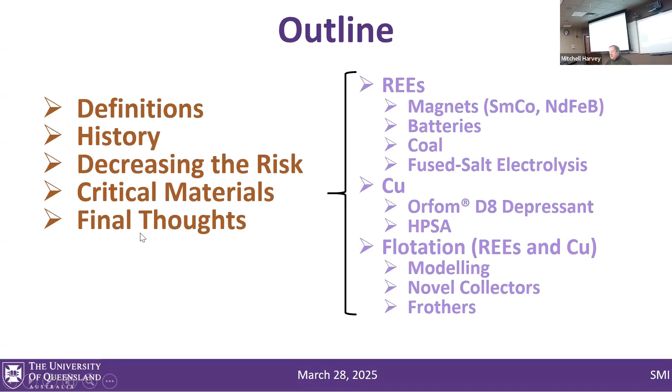Rather than just doing this critical materials part, the real outline is we're going to talk about Montana resources a little bit so you learn about Butte. Then Mitchell will take over with the samarium cobalt magnet recycling research that he's been doing. So that's the outline that you see there.

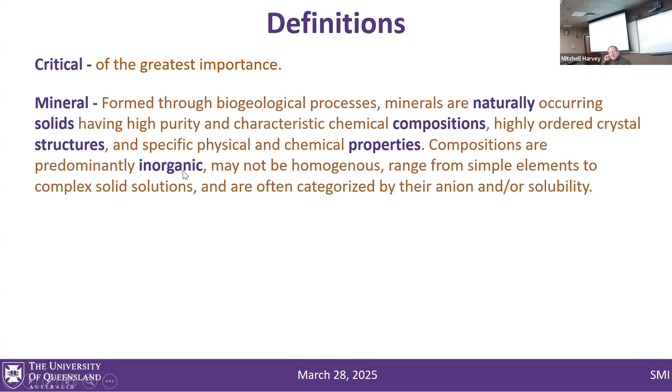So critical, what does it mean? Of the greatest importance. And when you define mineral, there's 5 or 6 categories that are very important for the definition. Number one, it needs to be naturally occurring, needs to be a solid, needs to have a chemical composition. It doesn't have to be precise all the time, but should be close enough to be in a particular composition, a particular crystal structure. Because of structure-property relationships, it'll have particular physical and chemical properties. And another major part of the definition of minerals is that it is inorganic.

Put the two of them together, and a critical mineral means a mineral that is deemed essential to society, but its supply is at risk for a number of reasons. It could be national security or the economy or what have you, but predominantly the supply is coming from unfriendly countries. Disruptions can come in a number of forms, whether it's government action, natural disasters, or increased demand in many other ways. The type of critical mineral varies with time, need, and country.

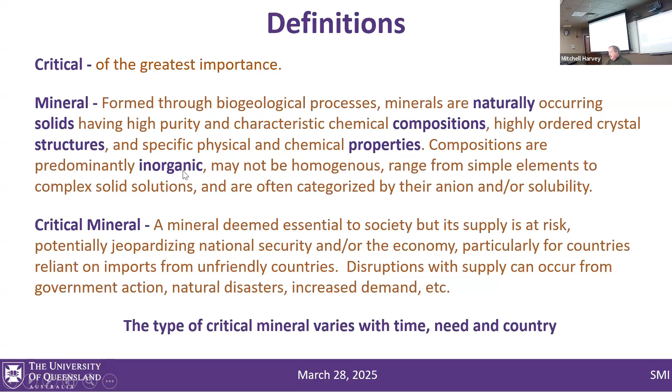So that's it for the definition part. Let's move on to the history.

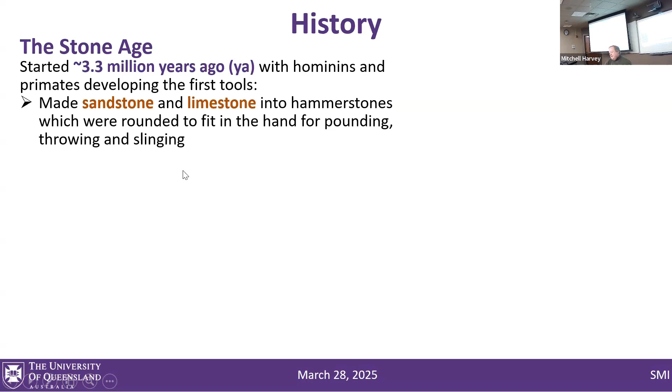Let's jump back to the Stone Age, some 3.3 million years ago, when man was barely walking, wasn't even man back then—it was hominins and primates. And of course what was important to them was sandstone and limestone. Eventually we would use those materials to help us fashion flint and obsidian into blades so that we could have knives and axes and spears and arrows, and we could go hunting and things like that.

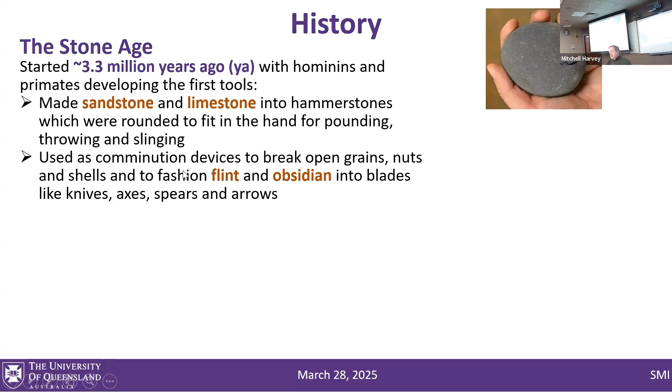But it wasn't until about maybe 5,000 years ago that we started to come out of the Stone Age into what we call the Bronze Age. Bronze is bronze because of the importance of tin, which we get from cassiterite, and the copper was coming predominantly from cuprite and chrysocolla, but some chalcopyrite. Somebody somehow figured out if you mix the two together, you get bronze.

Then in 1200 BC, not but 3,000 years ago, the Bronze Age just collapsed. Within a 50-year period, it's not really well known how it collapsed from region to region. It's just that it was gone, and in came the Iron Age.

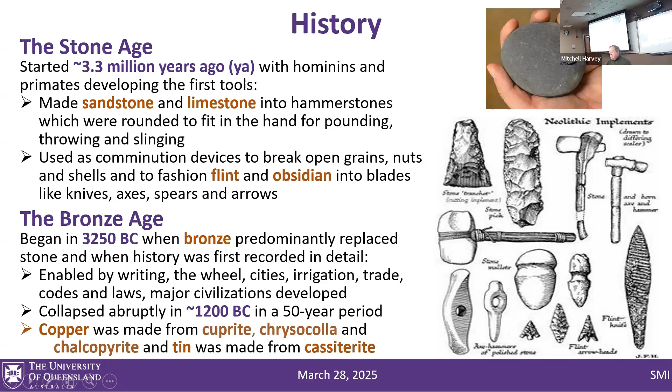Here the critical materials are minerals are hematite and magnetite, and those were used to make steel, even though it's called the Iron Age. We figured out how to adopt the bronze copper making process and apply it to steel. That required higher temperatures and purer forms of carbon—it was no longer really coal, but metallurgical grade coal, etcetera.

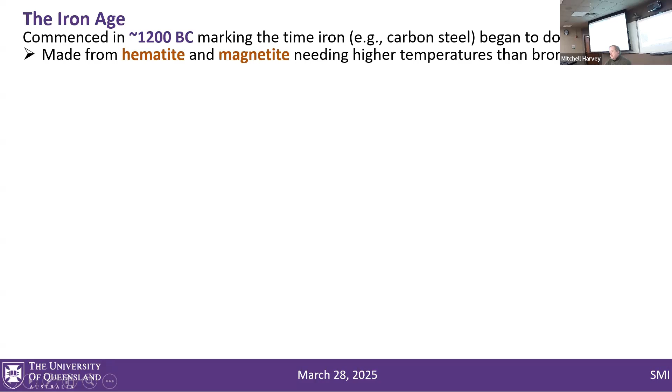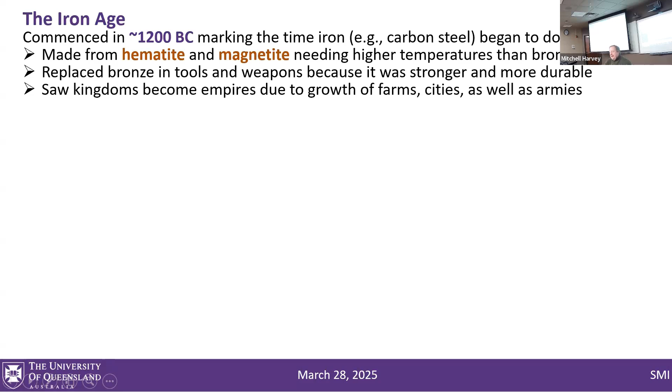Eventually iron, or steel, replaced bronze. Because of that, kingdoms grew, became empires. We were able to feed the soldiers, grow farms, and have cities with some sort of security. When you got happy soldiers, you got a happy government. So technically, though, man is still in the Iron Age.

3,000 years passed before anything really major would happen, and then that was the first industrial revolution, most of it in Great Britain and the United States, but across the world. 1760 to 1830 was all about industrial mechanization. Shortly thereafter, the second industrial revolution took place, and that was technological advancement.

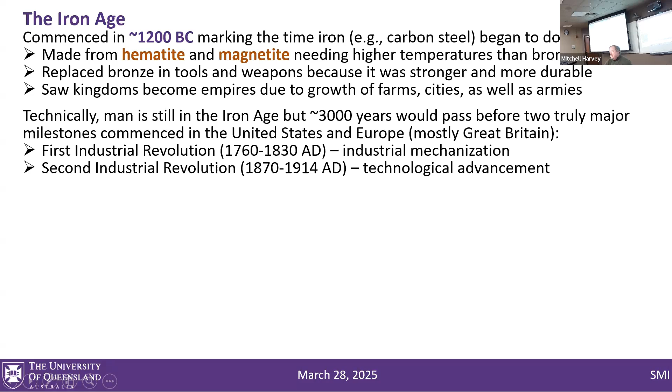Today, we have the periodic table at our disposal, if you will. Everything on that periodic table could become critical. It's interesting that the United States lists at least 50 on one particular list and another 19 on another list. Combining the two, I think there's like 53 critical minerals being listed.

Among those are copper, cobalt, and nickel, which typically, if you've got a copper ore, you've got cobalt and nickel as well—not always the case, though. And then, of course, rare earth elements are also critical, and many, many others. Those would include the 50 and the 19 that I was talking about.

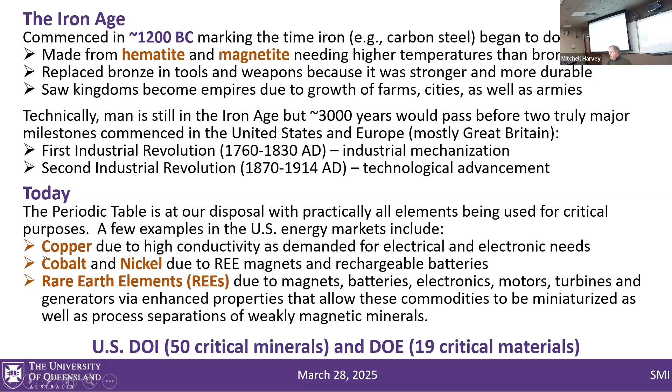This is the Department of the Interior and the Department of Energy. Combining the two lists and taking out the commonalities, it's 53 in all. Now that's a little bit different than copper and tin from the Copper Age and just iron from the Iron Age.

53 today, okay? Aluminum, antimony, arsenic, barite, beryllium, bismuth, cesium—I'm not going to name them all. There's the whole list, and we've sent you the PDF of this presentation, and you can see those for yourself. You probably already know them anyways, being the Sustainability Materials Institute.

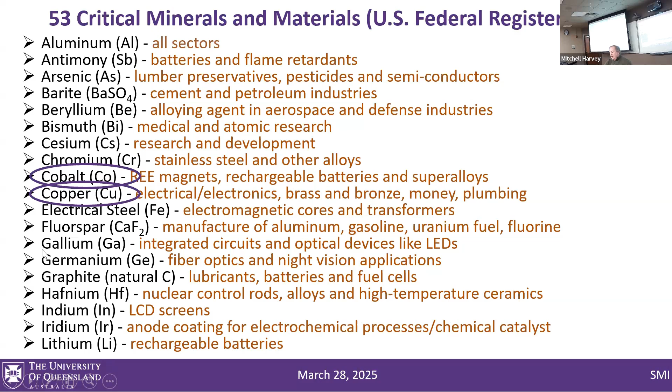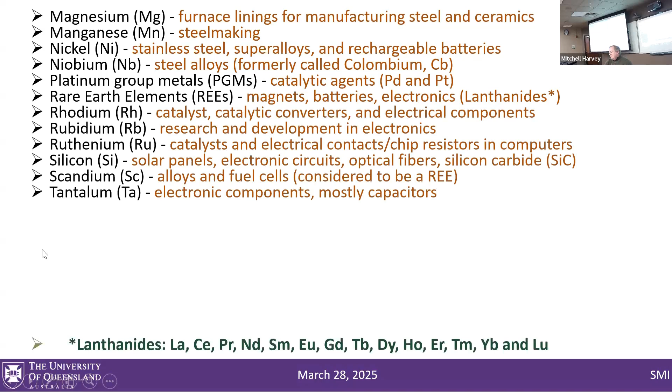But the ones we'll talk about today, predominantly copper and cobalt, because it's cobalt samarium being recycled. And then, of course, the rare earths that you see on this list and a whole number of other lists on there. It's particularly the samarium that got moved—oh well, that should be circling the samarium.

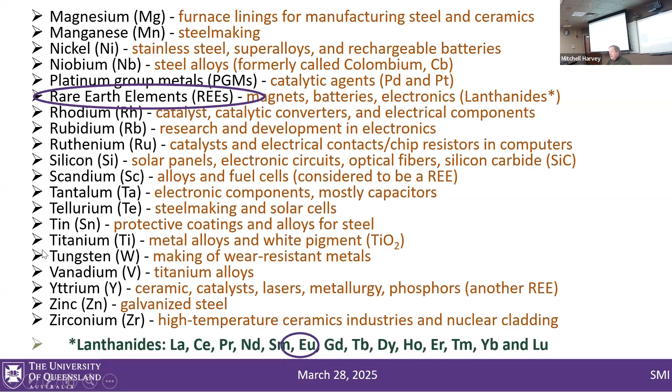Okay, so enough of the history, and we're going to talk about now decreasing the risk. So when we decrease the risk, there's several ways you can go about that. You can increase domestic mining and processing. President Trump, I think it was not even two weeks ago, signed an executive order to start increasing domestic mining.

We can also do that by starting recycling programs, and that's the research that you're going to hear from Mitchell. And then, of course, maybe sometime 50 years from now or whenever, we're going to replace samarium cobalt with something else. So we're always developing replacement materials.

It's important to understand that most critical minerals and materials are byproducts of processing primary mineral metal ores, and that's where this plot comes into play. The circle in the very center are your primary metals, and it's pretty obvious that if you've got copper, odds are that you're going to have selenium and tellurium as byproducts of that copper production. A little bit further away, you might have cobalt in there, and even further away, maybe some indium and other things. So all those minerals are on the critical list.

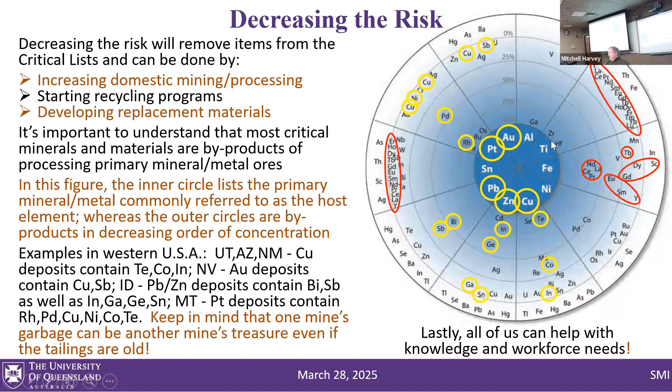Interestingly, a lot of the rare earth elements that you see, I just circled in red there—look at the primary minerals. You have a huge iron ore body on the west coast of Australia; maybe you got rare earths in those. I don't know. Beach sands, as we know, particularly the titanium industry, you got rare earths there. And tin, you can also have rare earths as well.

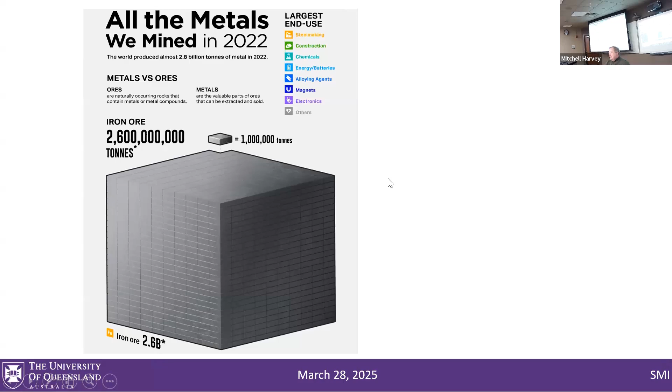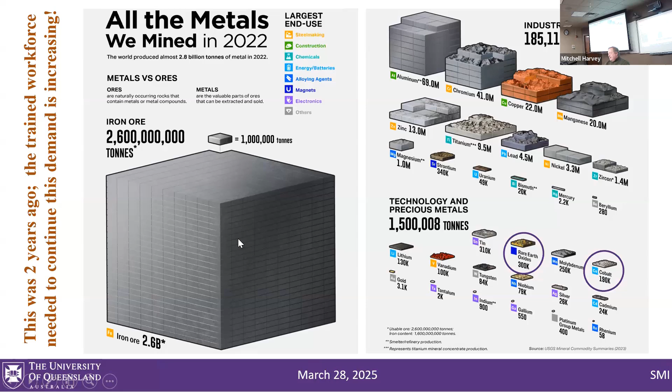That's incredible. So copper supply and demand: copper consumption over the last 25 years accounted for half of the copper ever mined. Copper consumption over the next 25 years will be equivalent to all of the copper mined to date. Australia and the United States are pretty good suppliers of that, but nobody matches Chile. Increasing demand requires increasing supply.

Chinese copper production is actually expected to go down, and so that's going to end up being a critical material for them, if it's not already. China is compensating by taking over production elsewhere, in the Congo, in Peru, and what have you. So they are getting those sources.

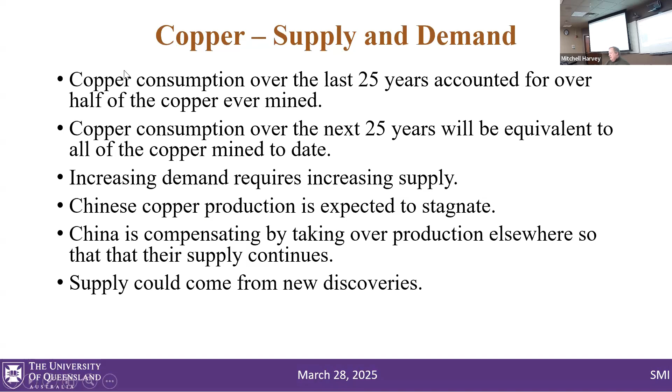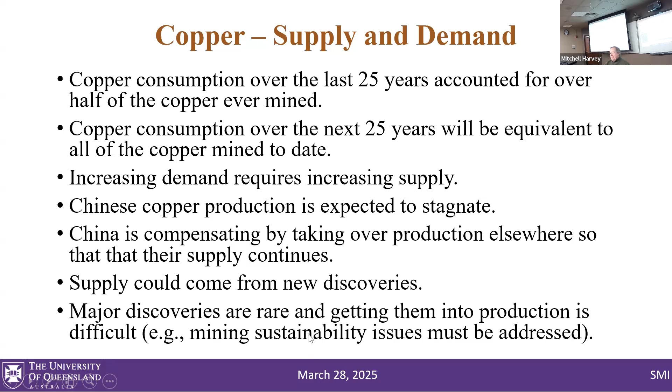Supply could come from new discoveries. New discoveries, though, are pretty rare. Once you find one, though, they tend to be quite large. Major discoveries are rare. Getting them into production is the difficult part because of mining sustainability issues, and that's where we come in.

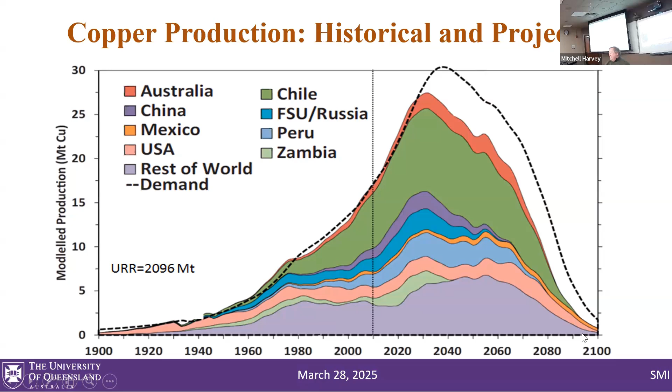Historically, you can take a look at this plot. China is in the purple, and that's what I said - they're not a huge producer, but eventually it's going to stagnate. Chile here in green is the dominant source, and they're going to be playing a major role. But take a look - 60 years from now, copper production, we're going to be out of ore. We've got to find new sources or replacement materials.

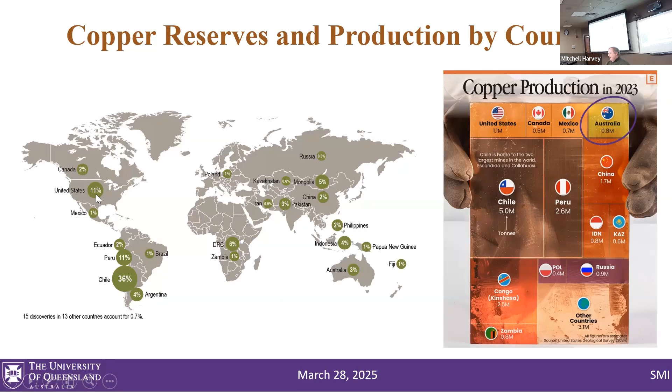So just take a look at copper production throughout the world. I just want to mention Australia is a major player, but they're only 3% of world production. Take a look at Chile at 36% production. The United States - where are we right here? 11% production. So not too different, but between us, we're pretty solid.

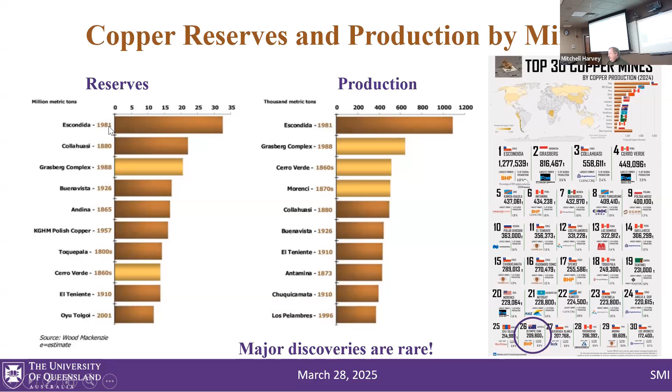This is by mine, and if you take a look at the top mines in the world, Australia is number 26 on the list - I think that's Olympic Dam. I can't read that fine print, but I'm pretty sure that's correct. Again, major discoveries are rare - look at the last one up there on the list, from 2001. So we need to do better.

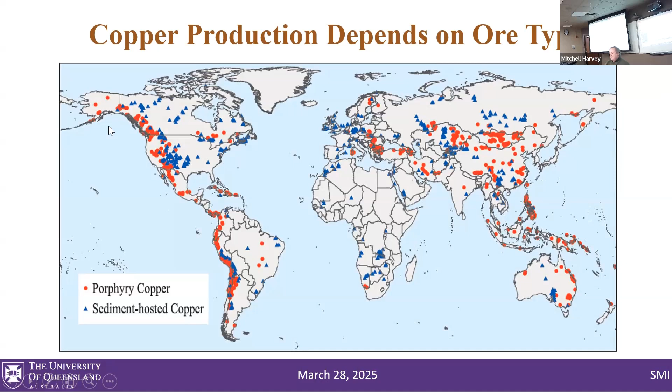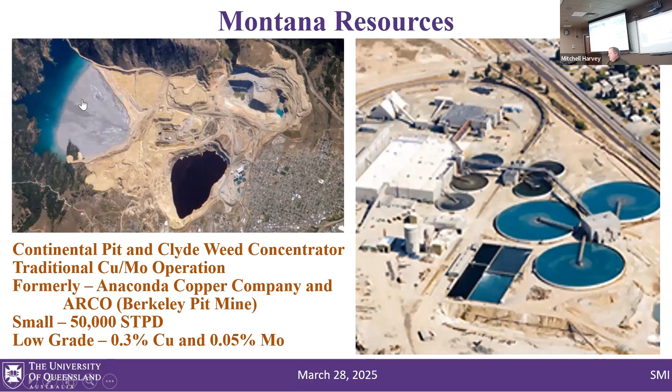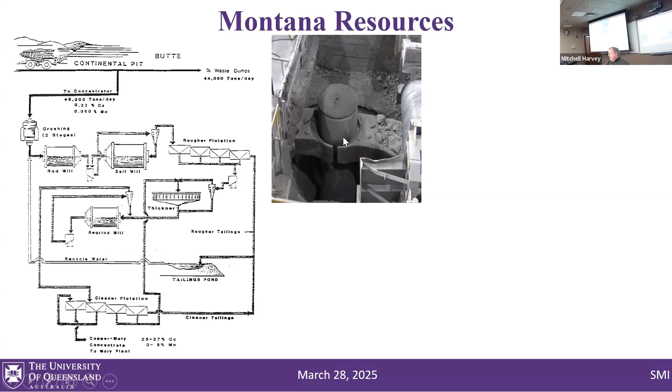So a little bit more close-up view of the process. Obviously, dominating the picture are the thickeners here. And just quickly, this is their process for the bulk sulfide production. So it starts in the main crusher, goes into rod milling, then it goes into ball milling from there, and you can see the row of ball mills in this sequence, or rod mill here.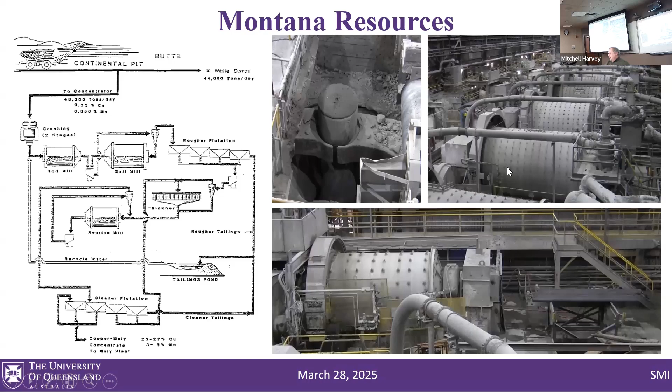I think for every rod mill, it feeds 2 ball mills, and the ball mills are twice as large as the rod mills.

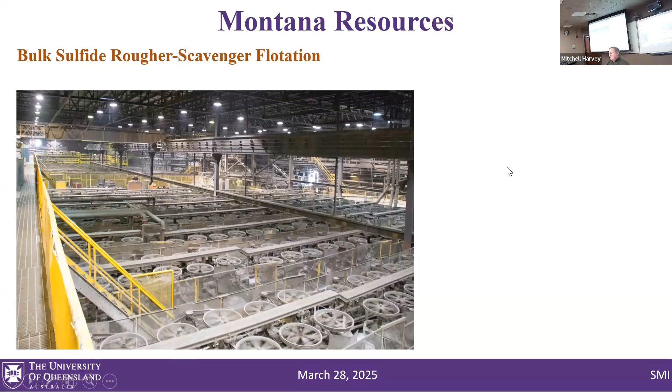Bulk sulfide concentrate flotation deck here. Fairly big. We do use the small flotation cells because these were built in 1955, and that's what we're still using. These are the old Galligher 200 cubic foot square cells.

Here's a close-up view of one of them, immediately below the viewing stand, and the parts that go into it. You've got the belt driving the rotor down below. You can see the rotor on this one, and the stator at the bottom surrounding the rotor.

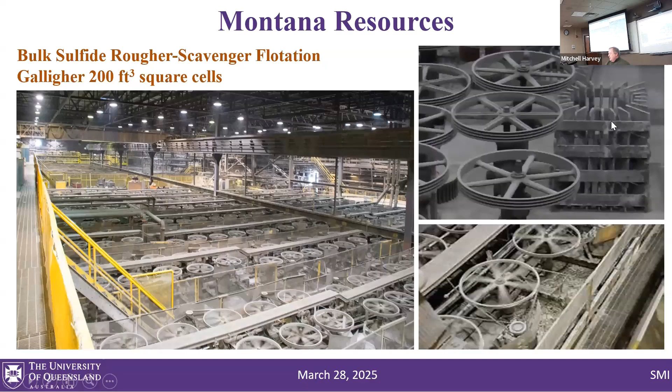200-foot diameter, super thickeners. They were super at the time. I think these are actually small compared to some of them these days.

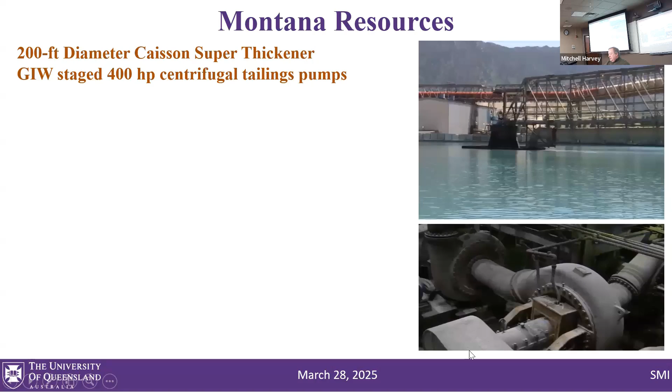The underflow goes into staged 400 horsepower centrifugal pumps. That's what these centrifugal pumps are. There's 3 of them staged, one here, and then one here, and then finally this goes up and over to land level.

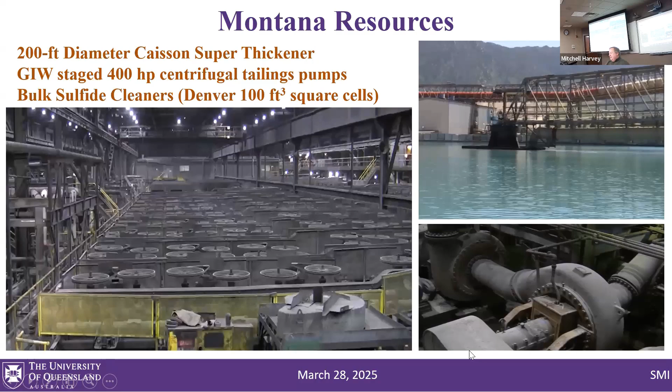And then the flotation turns over from the rougher flotation cells into the cleaner cells. So this is your final bulk sulfide concentrate.

That then gets shipped over to the moly plant. And here you have much smaller cells, around 100 cubic foot.

You've got the rougher, you can't see it, but it's up here. This is the first cleaner, second cleaner, and then third cleaner. And each stage has a bit of a regrind circuit, which you can see in the flow sheet here. In fact, there's the regrind mill right there.

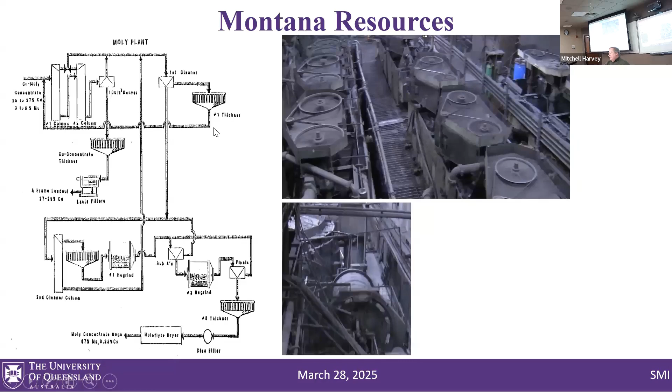And one of the thickeners, I'm not sure which thickener it is in that process. And then there's a better view of the thickener that you see right there.

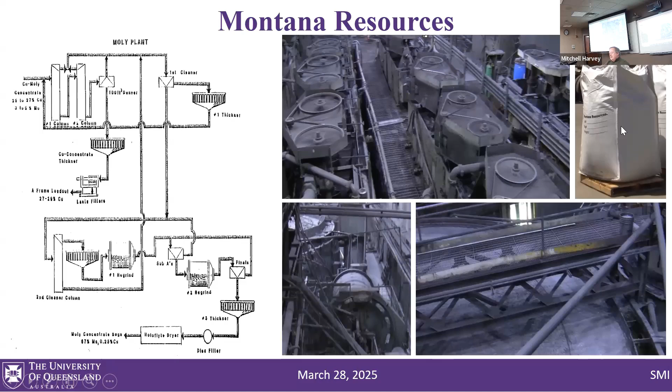The flotation product from the moly plant goes into packaging, and these are a little over 2-ton moly bags.

And that is the Montana Resources property. I'm going to turn it over to Mitchell for the samarium cobalt, and remind you that we do not have cobalt in Butte, but a source of cobalt is a byproduct of the copper industry. And of course, samarium is from the rare earth industry. So, Mitchell.

Okay, so I'm going to be talking about my specific work on a selective oxidation process for recycling samarium cobalt magnets as it relates to critical materials. First, I'll give some background, discuss the process as a whole, give you our preliminary results to date, and then some overall conclusions about the process.

First, it's important to know why we care about samarium cobalt. I'll give a brief history of permanent magnets. For most of human history, the best permanent magnet we had, the only one we even knew about, was lodestone, naturally magnetized magnetite. Other than making compasses, permanent magnets were kind of a novelty until we discovered electricity and then electromagnetism, and then we actually had a use for magnets.

In the early 1900s we had KS steels and MK steels, which are tungsten cobalt steels. They weren't particularly great magnets, but they were the first kind of attempts at strong permanent magnets. Then in the late 30s to early 40s, we discovered platinum cobalt. As you might guess, platinum cobalt was very expensive and only saw limited use, but it was the best technology at the time.

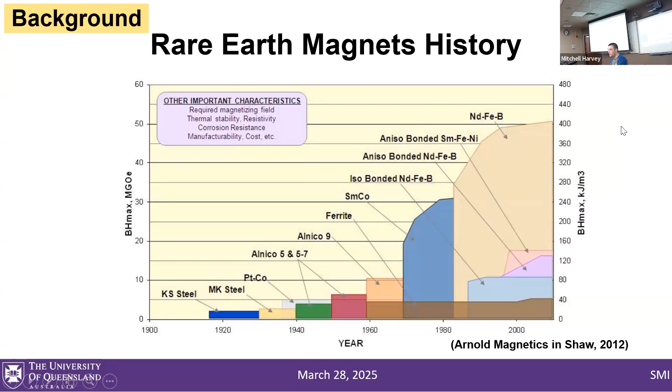So samarium cobalt magnets are either based on the samarium cobalt 5 intermetallic, those are the first generation of magnets, or the 2-17 intermetallic, that's the second generation, and the stuff I'm focusing on because it's the more prevalent technology today. And why we care about samarium cobalt is because even though it's weaker than neodymium iron boron magnets at room temperature, it has a lower reversible temperature coefficient.

So all magnets lose magnetic field strength as temperature increases. And depending on the material, they decrease more or less as a function of temperature. So samarium cobalt loses less magnetism with temperature. So above about 150 Celsius, samarium cobalt outperforms neodymium iron boron.

And so it sees a lot of use in very specific high technology applications, such as radar receivers, certain motors, and control surface actuators in airplanes. And so it's still used in very critical applications, although as a function of cobalt consumption, it's a very small percentage of the overall cobalt market.

Besides samarium cobalt magnets, cobalt's also used mostly to make cathodes in lithium batteries. It's also used to make cemented tungsten carbide. So if you've ever heard of tungsten carbide tooling, people think it's just pure tungsten carbide, but actually it's a bunch of tiny tungsten carbide particles glued together by a cobalt metal binder. So that's another big use of cobalt metal, but I'm getting off track here.

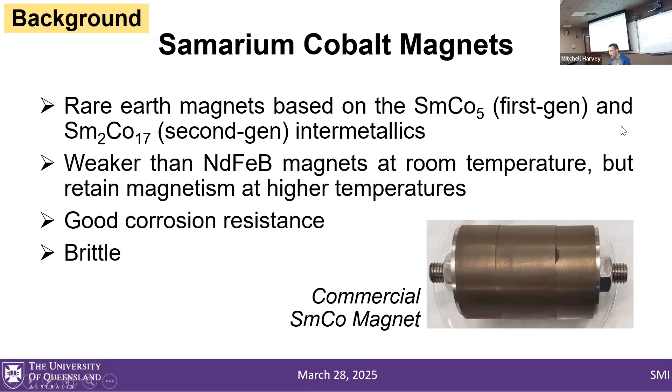Oh, another interesting property I forgot to mention is that the 2-17 magnets are cool. If you add gadolinium to them, which is another critical material, that reversible temperature coefficient becomes almost zero. So you can have magnets that have a constant field strength over a fairly wide temperature range. That's extra important, and like I said, the radar receivers are really important there because they operate at various temperatures and you need that magnetic field strength to be constant.

Courtney almost dropped his coffee cup.

So in addition to samarium and cobalt, the 2-17 magnets also contain appreciable quantities of iron, copper, and zirconium. You can see the different grades in the table below - there's the standard grade and the high temperature grade. All these elements, with the exception of iron, are considered critical in some capacity by various agencies, depending on who you listen to. So we want to look at recovering as many of these as possible.

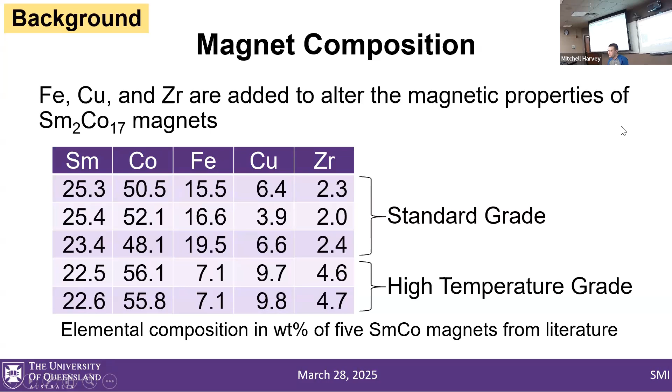And to do that, we're going to use selective oxidation. So intuitively, we know different metals oxidize more easily than others. So we have a generic metal plus oxygen going to a generic metal oxide.

Gold, for instance, is very noble. If we have a chunk of gold, we can heat it up in air to very high temperatures, even to its melting point, and then when it cools back down, it'll be just as shiny as when you started to heat it up. Other metals like iron are fairly reactive in air, and if you have an uncoated iron specimen in the right atmosphere, it'll oxidize quite rapidly. And then metals like sodium are extremely reactive and they'll react instantly.

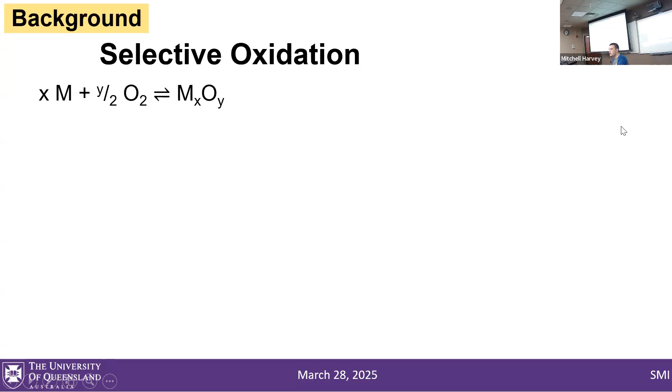Now, part of this is kinetics of the reactions, but the other part is thermodynamics. So this is the thermodynamic equation where you take the free energy of the reaction and do some math with it. But what it allows you to do is calculate the oxygen partial pressure in the atmosphere, so what pressure of oxygen, above or below which a metal will not oxidize.

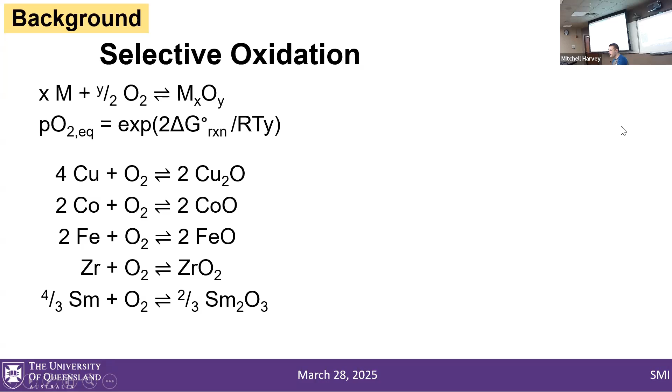So our goal with this project was to recover as high a grade of cobalt metal as possible, so hopefully, ideally, it could be used for not only creating new magnets, but also other applications such as cemented tungsten carbides or lithium batteries.

Unfortunately, cobalt and iron are very similar. They're not quite as similar as cobalt and nickel, but they're harder to chemically separate. And if we're going to try to retain the cobalt as the metal, we want to oxidize the iron away, so we force the iron to the oxide phase. The zirconium and the samarium are going to oxidize very easily. So we're going to control our oxygen partial pressure such that we don't oxidize the cobalt or the copper, but oxidize the iron, zirconium, and samarium.

And an important intermediate compound in this reaction is samarium ferrite. So in the previous slide, I assumed all the metals go to their oxide with no interaction between metals, but that's not actually the case.

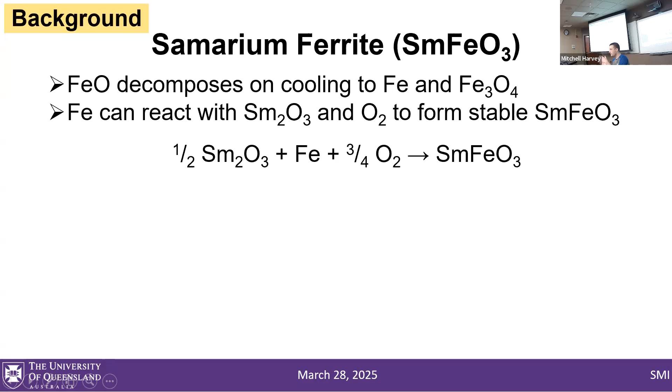And so we're going to try to form samarium ferrite. Iron metal reacts with samarium oxide to form the stable species samarium ferrite, and this is stable in that PO2 range between the cobalt line and the iron line. There's enough samarium in standard grade magnets to sequester up to half of the iron to samarium ferrite. So if we can sequester half of the iron to samarium ferrite, then the remaining iron monoxide, when it cools, only a quarter of that will decompose. So we can sequester 7/8, or about 88%, of the iron in the oxide phase, greatly reducing the iron content of our cobalt. And in the bottom right, you can see some of the samarium ferrite.

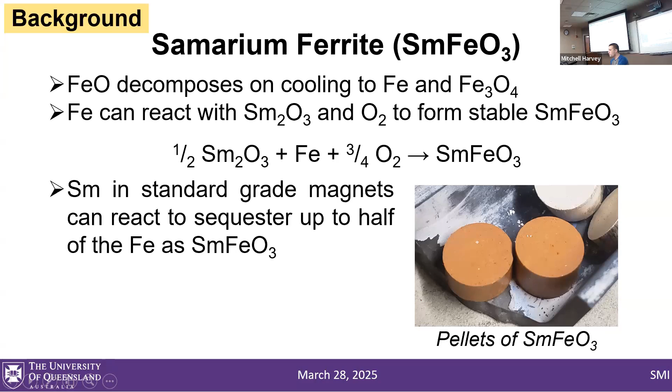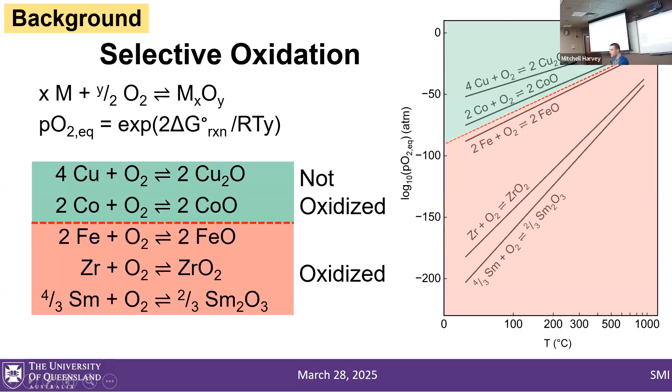And we don't want to do that. We're trying to retain the cobalt as a metal. So what do we do? Well, fortunately, copper has limited solubility in cobalt. If we look at the phase diagram, below about 500 C, there's almost no solubility of copper in cobalt.

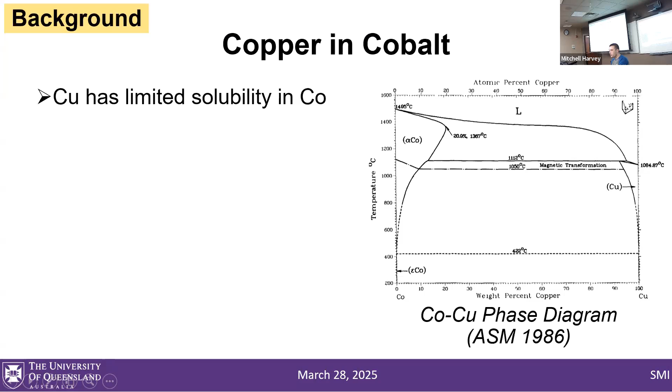I'm skipping ahead a little bit to show you a brief result. When we do this selective oxidation process, and all the other stabilizing elements, the samarium and zirconium that help stabilize the cobalt or the copper in the alloy, are removed by oxidizing them, you actually get these blebs and streaks of copper that precipitate in the oxidized magnets. So we're hoping we can leverage this to separate the copper and the cobalt.

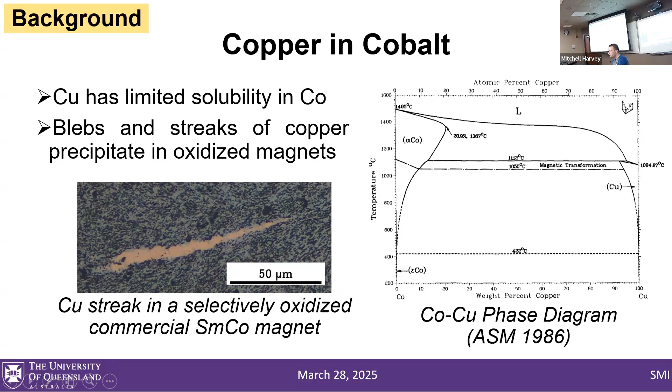So this is the overall reaction that we're building to. We've got samarium, cobalt, iron, copper, and zirconium plus oxygen going to samarium ferrite, iron monoxide, cobalt, copper, and zirconia. Then the iron monoxide decomposes to iron metal and magnetite.

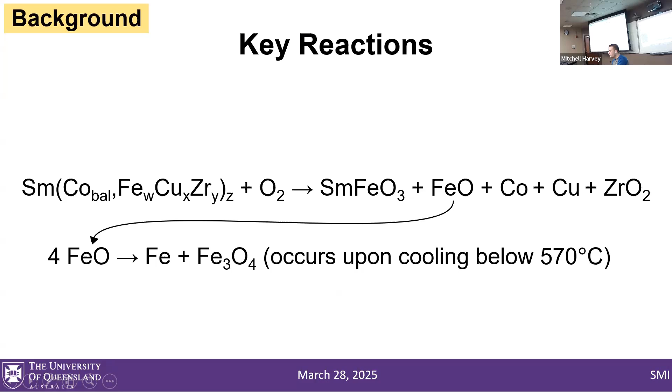You might notice a few things about some of these species. Cobalt and iron are both ferromagnetic, so they're very strongly magnetic. The magnetite is very magnetic, not quite as magnetic, but still quite magnetic. Samarium ferrite is weakly magnetic, and copper and zirconia are not magnetic to any appreciable extent.

So if we can somehow oxidize these magnets and then grind them and liberate all these individual phases, we should be able to perform magnetic separation. And using no chemicals other than oxygen, we can do a pretty good job of separating all the different components.

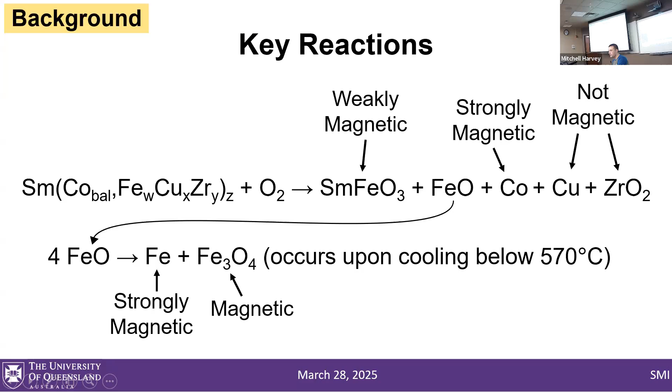And this is the process flow sheet that we've developed for that. First we take our scrap magnets, crush them to increase the surface area, perform our selective oxidation process, then grind them to liberate the phases, leaving us with a mixture of cobalt metal, iron metal, copper metal, magnetite, samarium ferrite, and zirconium oxide. We then do our magnetic separation.

Our strongly magnetic phases, cobalt and iron, are recovered as is. Our copper and zirconium oxides are our non-magnetic fraction. We then leach those with your acid of choice — in this case, I'm showing sulfuric acid. And then we can control the Eh and the pH to not dissolve the copper, but dissolve the zirconium.

Our weakly magnetic fraction, the magnetite and the samarium ferrite, we then send forward to a selective reduction step. Samarium is very difficult to reduce, whereas iron is fairly easy to reduce. As Courtney was saying, we discovered the technology to reduce iron centuries ago. It's very easy to reduce.

So if we throw carbon or hydrogen at the samarium ferrite and the magnetite, we will reduce the iron to iron metal while keeping the samarium as samarium oxide. That's how we're going to separate the iron and the samarium there. So this is our flow sheet.

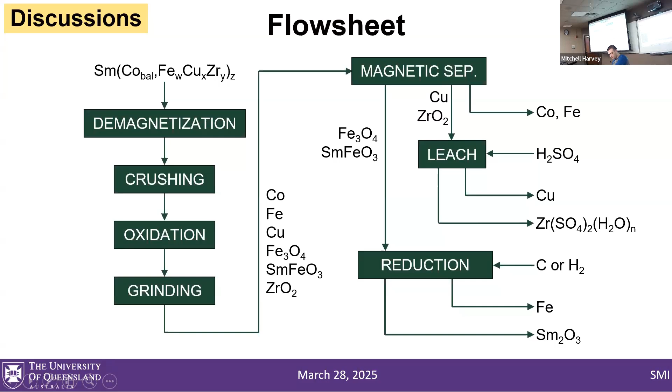This whole selective oxidation process revolves around controlling the PO2 within a fairly narrow window, as you saw in the previous graphs. If you look at our graph here, the scale on the left — I didn't highlight it before — this is the base 10 logarithm of the oxygen partial pressure in atmospheres. You can see it's negative tens of numbers, negative tens of atmospheres.

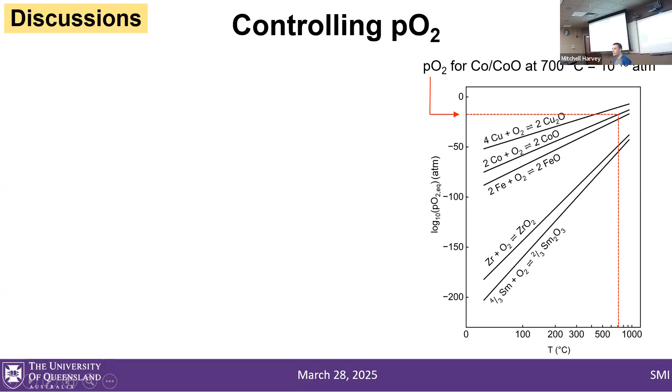For example, the cobalt oxide line at 700 degrees Celsius has an equilibrium oxygen partial pressure of 10 to the negative 18 atmospheres. That's so incredibly low — you're never going to get this oxygen concentration by just diluting oxygen with argon or some other inert carrier gas. So how do we get there?

Traditionally, you would use mixtures of oxidizing and reducing gases, such as carbon monoxide and carbon dioxide, or hydrogen and dihydrogen monoxide. And these work very well. If we were ever to scale this process up to an industrial process, the hydrogen-water route would probably be the way to go.

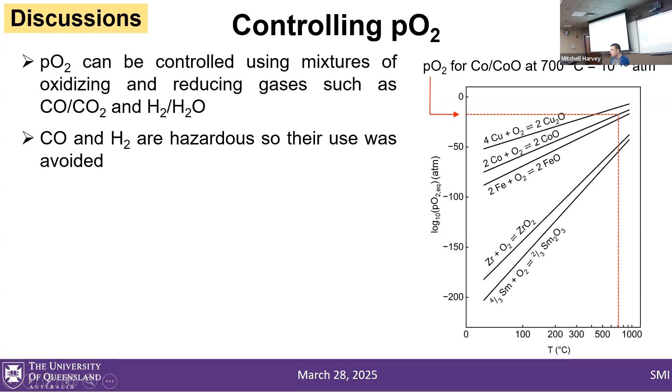But on a lab scale, we just don't want to work with these. We don't want to work with carbon monoxide — it's toxic and flammable. And hydrogen is also very flammable. So what choices do we have left? Well, these lines that I've drawn are the equilibrium between cobalt metal and cobalt oxide. So what if we just mix together cobalt metal and cobalt oxide?

They're going to react at high temperatures. If there's any extra oxygen in the system above the equilibrium value, the cobalt metal is going to oxidize to cobalt oxide. And if there's too little oxygen below the equilibrium value, the cobalt oxide will decompose to cobalt metal, releasing oxygen.

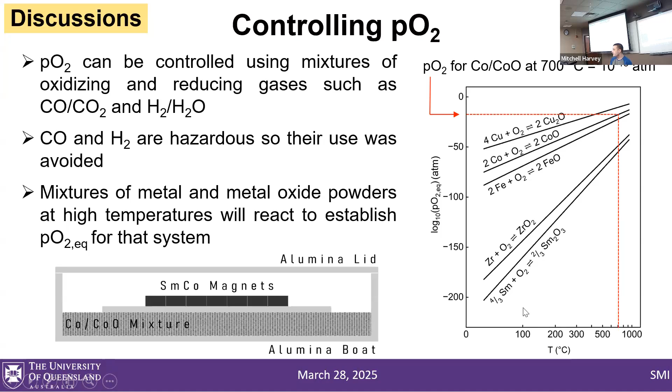What we're doing is placing the cobalt oxide mixture, then placing our magnets on top of that. The oxygen will diffuse and transport through the atmosphere and selectively oxidize our magnets. We're trying to do kinetic studies to figure out the best way to actually do this, but for right now, this is just our setup.

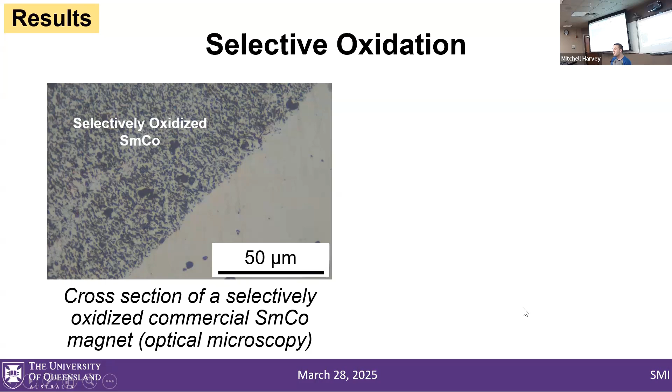And our results so far, you can see this. This is a cross-section, a zoomed-in polished cross-section of one of our selectively oxidized magnets. In the top left you have our selectively oxidized zone, where the dark spots are oxide particles and the light spots are cobalt and iron metal particles. In the bottom right you have the unreacted samarium cobalt.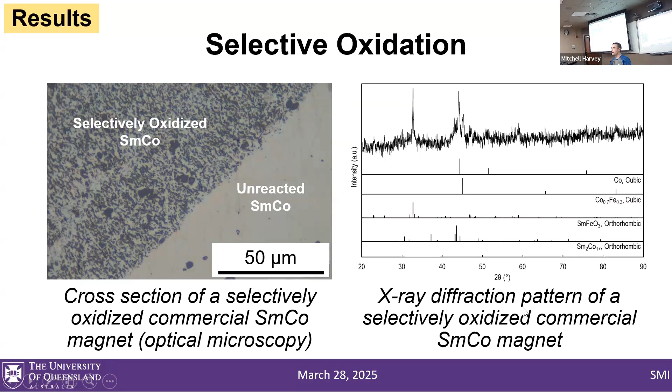If we do X-ray diffraction on this, it helps us determine what crystal phases are present. We can see we have cobalt metal, probably some iron and cobalt metal in solid solution, samarium ferrite, and the unreacted intermetallic. This is a pretty noisy scan, and it's pretty hard to get a good scan with the copper tube, but we can see pretty confidently that we have both cobalt and samarium ferrite. So the overall reaction we were showing before, we're pretty confident it's progressing as predicted based on thermodynamics, and this is also backed up by some other literature results.

We go to SEM now. This is a much higher resolution SEM image of a commercial magnet that has been fully selectively oxidized. We can see a lot of interesting things. This is a backscattered electron microscope image, and the important takeaway is that the brighter the area, the higher the atomic number. So the very bright areas are rich in samarium and the very dark areas are samarium poor. Hence bright areas are samarium oxides, dark areas are cobalt metal.

And we get a very interesting oxide microstructure. At the edge, the oxide microstructure is very fine, and as you progress toward the interior it gets very, very coarse. Part of the work we're trying to do is optimize this microstructure, trying to get this very coarse oxide, because the fine version is very difficult to separate. These oxide particles are maybe 1 to 10 microns, and the coarse ones are 10 to 50 microns, depending on how you measure them.

Another interesting feature of the selective oxidation is you get this core of metal. This magnet has been fully oxidized for multiple days, and this is a core of copper, cobalt, and iron metal that segregates in the middle of the magnet. So you can very easily break off the outer shell and get access to this nice meaty metal core. Unfortunately, to date...

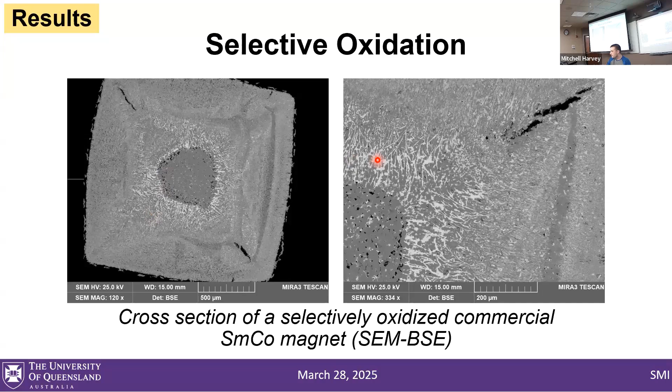Liberating the samarium ferrite in the selectively oxidized magnets has proved quite difficult due to the ductility of the cobalt phase. The oxide particles are very small, and the cobalt is the continuous phase, so the cobalt metal completely encapsulates all the oxide particles. Cobalt is a metal, and metals are ductile — we knew this going in — but we were hoping that if we ground the metals enough, if we cold worked them enough, they would become brittle and we'd be able to liberate the two phases. But that's just not been the case.

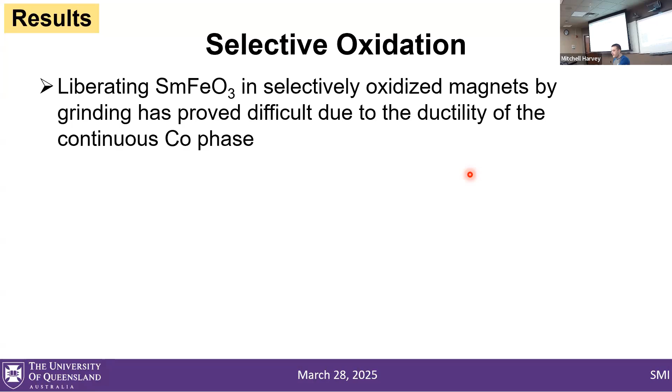So we've had to resort to our backup plan, which is melting the cobalt. If you heat the cobalt to its melting point, it's going to melt and coalesce into one bead, and then the oxides float to the surface. You let it cool, and then you can break the two apart. Unfortunately, this is a lot more energy intensive — it requires higher temperatures, so it's probably more energy intensive than other low temperature physical separation steps, but it works so far, and this is the best we have to date. On the bottom left, we have our oxidized magnets in a crucible in an induction caster, and on the right you have the cobalt metal and the oxide we recovered from it.

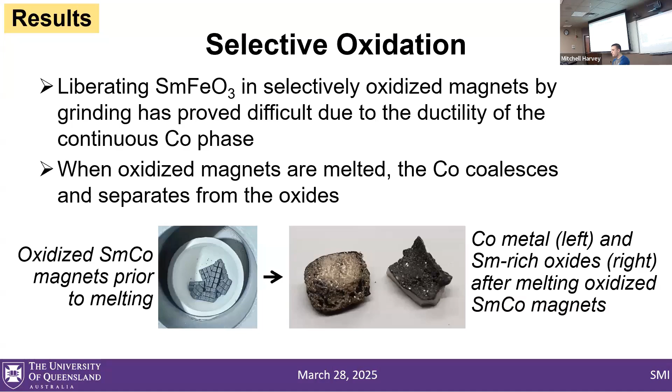So now that we have the oxide recovered, we have that samarium ferrite, how are we going to separate the samarium and the iron? I talked about before how we're going to do selective reduction, but how exactly do we do that? This is the reaction that we believe is happening.

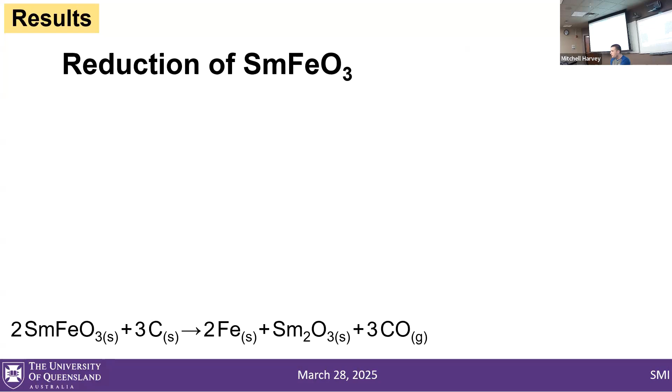Our samarium ferrite plus carbon goes to iron metal plus samarium oxide plus carbon monoxide. To do this in the lab, we just mix the samarium ferrite and carbon powders, pelletize them, heat them up to 1400 C under argon, and then this is what we get.

We use carbon powder, like I hinted at before, because it's very accessible in the lab, but the thermodynamics are very favorable, and there's no reason this shouldn't work with other reducing agents, such as water gas or pure hydrogen.

But the resulting product is blebs of iron dispersed in a porous samarium oxide matrix. Unlike the oxidized magnets, the continuous phase here is brittle - it's the brittle samarium oxide. So it's very easy to grind.

And then iron, again, is magnetic. Samarium oxide is not magnetic, or at least it's paramagnetic. So we can very easily grind and do magnetic separation to get a concentrate that is free of any iron. You can see that here.

This is X-ray diffraction again. Each of these peaks are labeled with what phase they represent. This top line is the as-reduced sample - we've got peaks for both the samarium oxide and iron metal. Then our concentrate, done by grinding and magnetic separation, has no iron peak. This main iron peak is completely absent in the samarium concentrate.

And then the iron concentrate still has a fair amount of samarium oxide. However, this was a proof of concept test done in a mortar and pestle. We have plans to do this with much better grinding equipment where we think we can get full liberation of the samarium oxide and the iron metal.

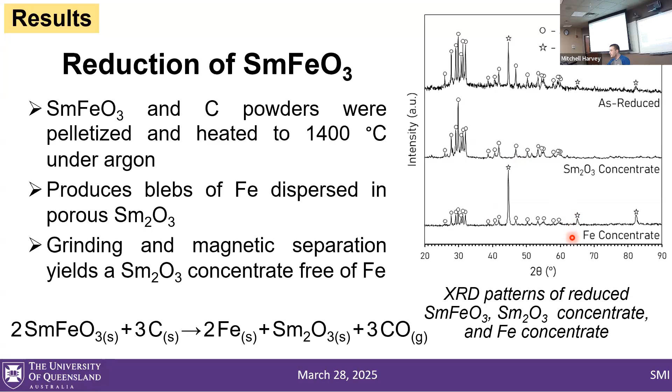So this is all of our work to date. We've demonstrated that both samarium and iron can be selectively oxidized in commercial samarium cobalt magnets. Physical separation of the phases is complicated by the really fine microstructure, but melt coalescence seems to be a valid method if nothing else works.

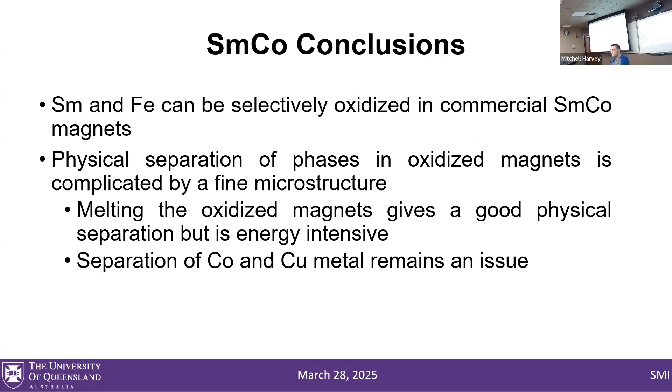Separation of the cobalt and copper metal remains an issue - we haven't done much work into figuring that out. And the fate of the zirconium oxide is unknown. Because it only makes up about 2% of the magnets, we haven't stumbled across it when doing SEM EDS. We haven't actually found a particle yet, so we have yet to do a more time-intensive scan to actually find it.

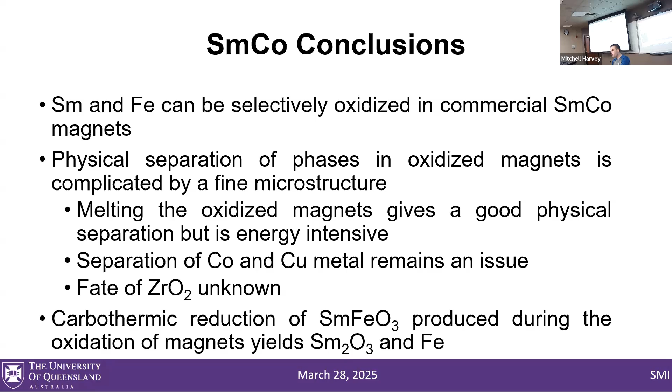So we want to do some more tests and try to figure out where exactly the zirconium oxide goes and how we can recover it. Also, samarium ferrite we can reduce to samarium oxide and iron metal, just as we predicted.

So I think Courtney's now going to finish up with some final thoughts. All right, nice job, Mitchell.

So some final thoughts. We're now engaged, in my opinion, in a third industrial revolution. So my question to you is: is the Iron Age over? Are we in what I would call a materials age, because we have so many more critical materials these days? Maybe some might even call it the space age.

None of this happens without geology, mining, mineral processing, extractive metallurgy. These disciplines are the pillars of society, and you're starting to see a huge turnaround in the U.S. economy because our president, even though he can rub people the wrong way, I do believe he's going in the right direction. The easy ores are gone.

Next gen engineers and scientists are going to need to find, extract, process, and separate, and that includes domestic resources, primary and secondary materials. So my question to you is really that simple.

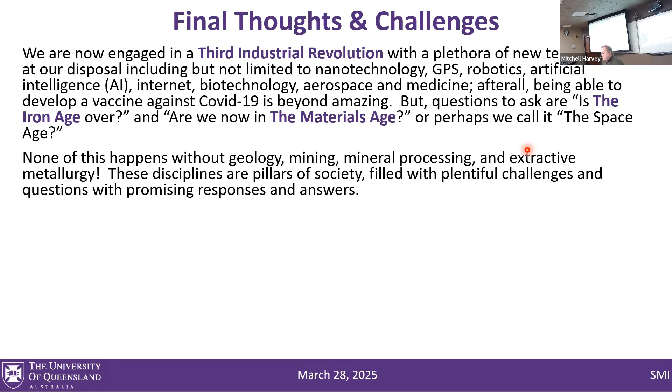I believe we're now in the materials age. We all need to get involved. Even that part is critical, that workforce. I keep forgetting to hit the return button.

I apologize for that. But we can also look to new places - deeper underground mines, seafloor beds, undersea mines, nearby celestial bodies. We've got a long ways to go, and we've got a lot of places to go.